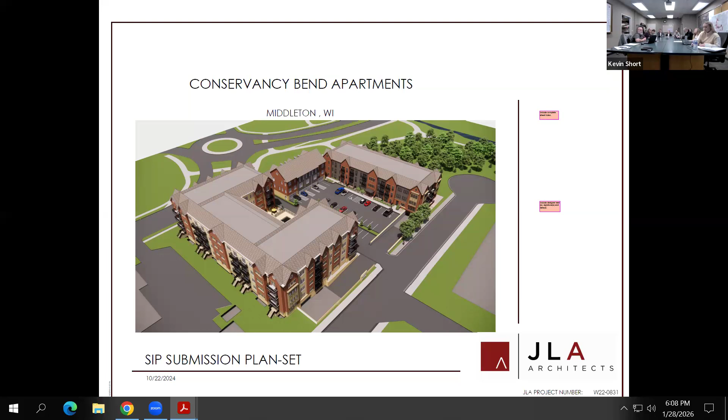So T-Wall Enterprises submitted to the city for review a specific implementation plan, or SIP, dated October 22nd of 2024. The Conservancy Bend apartment development is located south of the Pheasant Branch Creek corridor. It's between Parmenter Street and the high school campus. So it's pictured there in yellow.

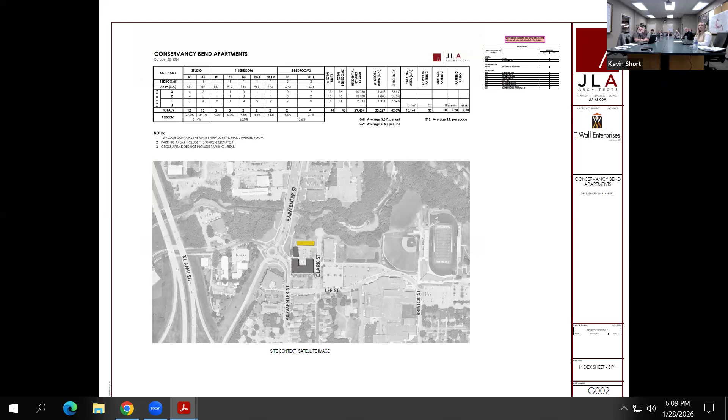It shares a parcel line with the Pheasant Branch Creek Conservancy. The proposed development is the building shown there in yellow, and the black dashed line to the north of the proposed building is the parcel line, or the property boundary.

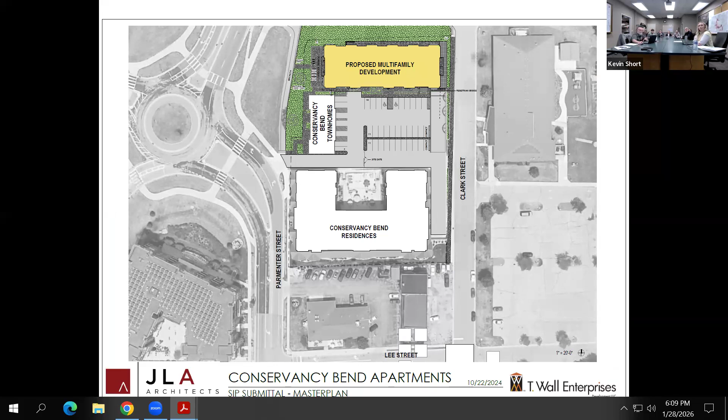And those are on page 2 of the minutes. I'm going to read number 4, which is resolution of all engineering staff recommendations embedded in the plan submitted on 10/22 of 2024.

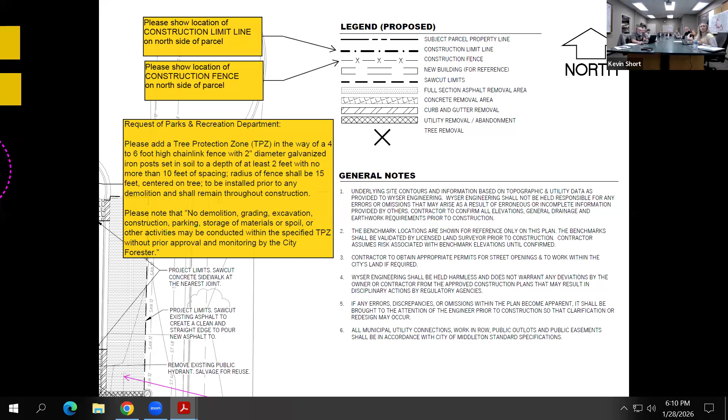So staff recommendations embedded in the plan included the following. Staff requested that the developer show the location of the construction limit line and the construction fence on the north side of the parcel. Both of those are shown in the legend of sheet C101, which is the demolition plan, but neither of them are shown on the plan on the north side of the parcel.

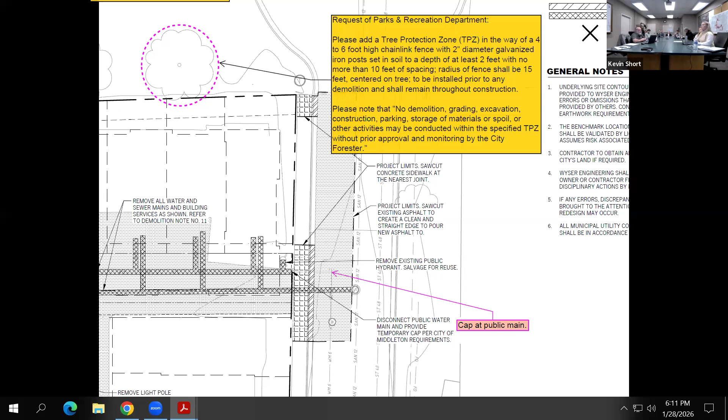Additionally, staff recommendations embedded in that plan included the following. Staff requested addition of a tree protection zone fencing for the Pheasant Branch Creek Corridor Conservancy Oak, and provided a specification for that fencing. The staff note references our forestry ordinance, chapter 20.06, paragraph 2, protection during excavations.

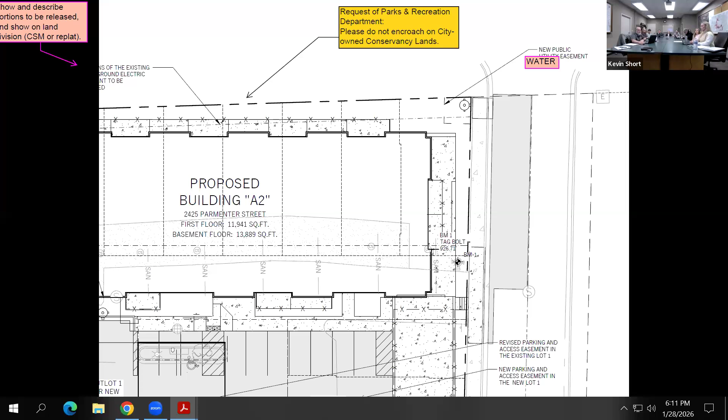Additionally, on 4 occasions in that plan, construction activities, we requested that construction activities do not encroach on conservancy lands, with the comment: please do not encroach on city-owned conservancy lands. That is on C102, the site plan; C200, the grading and erosion control plan; C201, the detailed grading plan; and the landscape plan, L100.

And on that same sheet, staff requested that the zoning of the abutting parcel be noted. Our conservancy land, Creek Corridor parcel, is zoned as conservancy. That's a requirement of a landscape plan as per 10.08.20, paragraph 3 of municipal code. It's a requirement of the plan submission.

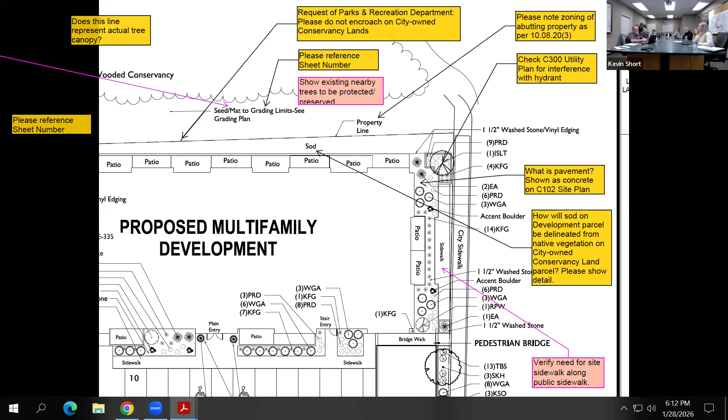So in response to those comments in the staff recommendations, the developer did not change the distance of the north side wall from the parcel line or the location of the building. The developer did not approach this committee and discuss use of the Conservancy land for that construction. But the developer did submit a revised plan set.

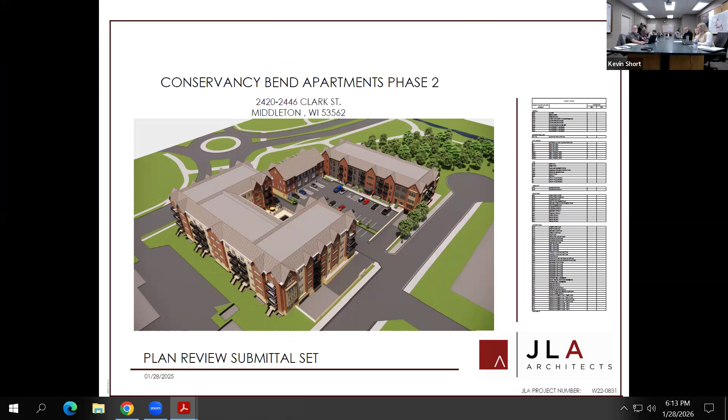On January 28th, 2025, T-Wall Enterprises submitted a plan review submittal set. On sheet G001, which is the index sheet, the second page in the document, it lists the general contractor, the architect, the civil engineer, and the structural engineer as part of the project team.

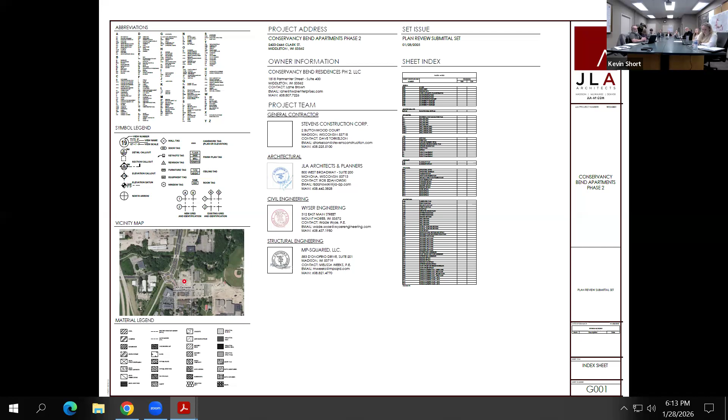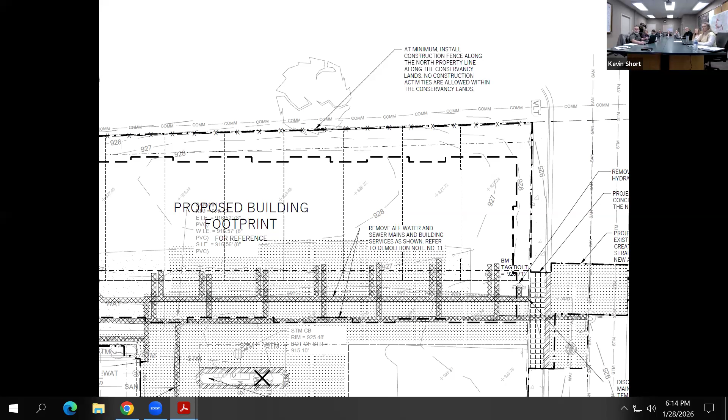So that plan set did address the contingencies of the Plan Commission motion. The request to not encroach on city-owned conservancy lands and the request for fencing were addressed on two sheets with the statement: at minimum, install construction fence along the north property line, along the conservancy lands. No construction activities are allowed within the conservancy lands. That is on page C101, the demolition plan, and sheet C200, the grading and erosion control plan.

The landscape plan, sheet L100, includes a reference to our forestry chapter 20.06, the one I mentioned earlier. And that reads: all trees on terrace, median, or other public-owned property near any excavation or construction of any building, structure, or street work shall be sufficiently guarded and protected by those responsible for such work as to prevent any injury to said trees.

Oh, Edgar, that needs to stay open. Yeah, sorry.

It continues: during construction operations, each contractor or builder shall erect suitable protective barriers around public trees and shrubs which could be injured during construction, and shall obtain the city forester's approval of the adequacy of such barriers before construction is commenced.

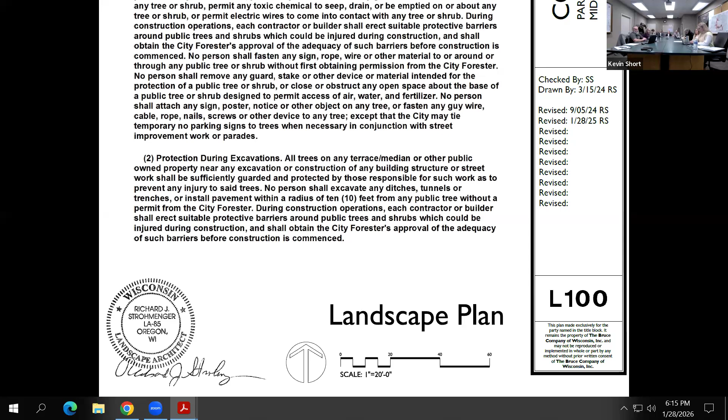So based on the review of that plan submittal set, city staff determined that the contingencies of the Plan Commission motion from November of 2024 were adequately satisfied, and a building permit was issued on August 1st, 2025. I don't have a photo of that, it's a blank page, sorry.

But let's talk about the tree. During the winter of 2024-25, our Conservancy Lands forestry staff crew made reduction cuts on the south side branches of the oak tree, to provide clearance for any future construction activities that would encroach on the Conservancy side of the parcel line.

During the spring of 2025, the Conservancy Lands crew conducted a prescribed burn of the Parmenter Bowl, which includes this area, and followed the burn up by overseeding with a diverse mix of native forbs and grasses.

During the growing season of 2025, Conservancy Land staff, our Oak Hill Correctional crew, and city contractors removed invasive species from the creek corridor, including this area, in accordance with the October 2024 Pheasant Branch Creek Corridor Restoration Plan that was approved by this committee.

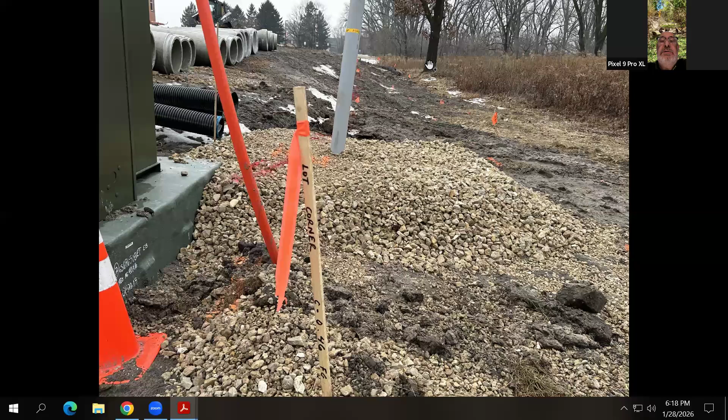This photo shows the view down the orange flags of the communication line, which from the plan set, where this communication line crosses the parcel line, is about 6 feet north of the property line. At the oak tree, it's about 4 feet north of the property line. So that gives you a good scale looking down that line of communication line flags.

Hey Kevin, isn't that tree supposed to have a fence around it? Could you speak louder so we can hear? Just wondering if that tree is supposed to have a fence around it. The plan review set doesn't specify a tree protection fence around the tree, it specifies a fence along the property line. Okay, so yes, they're supposed to have that.

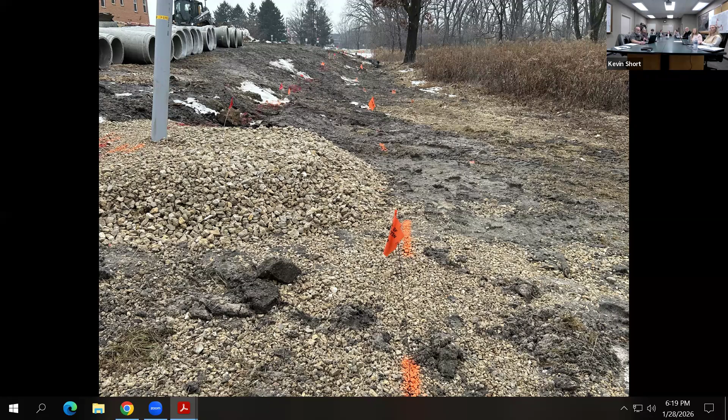This final photo, from January 6th, just a few days ago, shows the base of that oak tree, and shows erosion control sock that's a foot or two north of the communication lines we saw in the last photo. So that puts that erosion control sock 6 to 8 feet out from the property line.

And that takes us to a point. In a letter dated January 22nd, 2026, T-Wall Enterprises / Conservancy Bend 2 Residences LLC is requesting a temporary construction easement. According to that request, the general contractor, who from the plan review submittal set was a member of the project team since at least January of 2025, is now recommending a temporary easement 15 feet from the property line to, quote, protect construction team members, pedestrians, and the Conservancy.

I can't comment on the safety of the construction team members, but I can verify there's no pedestrian infrastructure along the north property line. The closest pedestrian infrastructure is, one, the sidewalk along the west side of Clark Street that ends at the property line, and two, the asphalt path on the east side of Parmenter that leads down to the creek corridor path. As far as protecting the Conservancy, I would argue the best way to protect the Conservancy would be to install the originally requested fence along the property line and restrict any activities within the Conservancy.

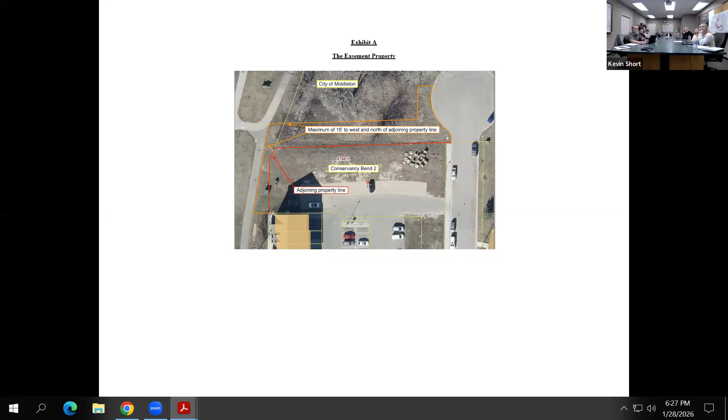So this is Exhibit A. This is the easement property. This exhibit is a clean copy, meaning those are the notes provided to me. So this is the exhibit that defines the easement.

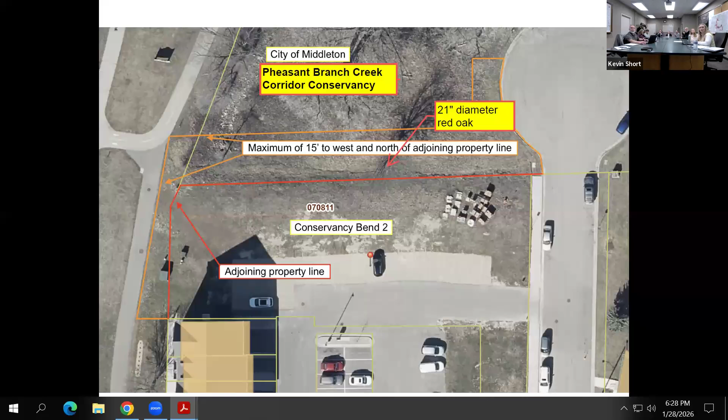Okay, I'm going to go to the next page here. These are my notes in yellow. I labeled the Pheasant Branch Creek Corridor Conservancy, and I labeled the location of the 21-inch diameter red oak. And then this is more of my notes here.

So remember, this is Exhibit A. This defines the easement. In the temporary construction easement letter request, a 15-foot easement is requested. The text of Exhibit A reads maximum 15 feet. However, their graphic shows a far greater area. The exhibit shows a 61-foot boundary from the north along Clark Street here, and shows a 26-foot boundary throughout the rest of the area.

And then to the west, this line is the property line, the red line is the parcel boundary. So to the west is areas outside of conservancy land, which I would say is outside of what this committee might be willing to make a call on. This is City of Middleton right of way, and these lands both have stormwater infrastructure. So I would argue that Public Works Committee and/or Stormwater Management Commission should weigh in on any permission given for those areas.

That's where we come to. So we have a recommended motion: number one, recommend to Public Works Committee and Stormwater Management Commission review of the temporary limited easement agreement for a recommendation to Common Council on any of the affected areas of proposed easement that are on city right of way with stormwater infrastructure. And a staff recommendation to recommend to Common Council denial of the temporary limited easement agreement between the City of Middleton and Conservancy Bend residences.

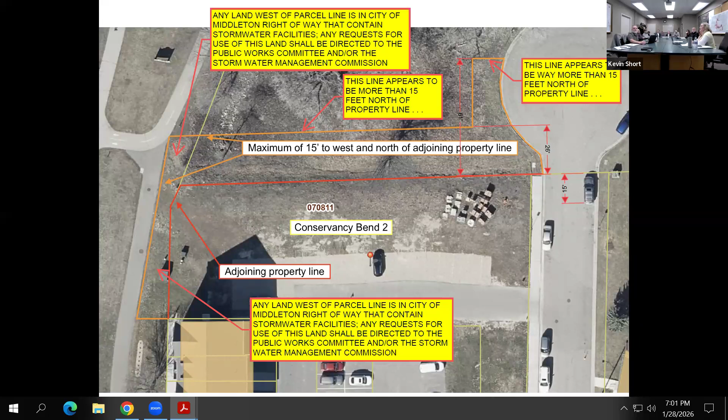And it's about the activities that you're asking to take place within that easement. Tom, are you asking to see the easement document with the construction activities on it? Yeah, I'm not married to that easement.

Again, collaboration is the name of the game. I've been doing this long enough to know that every good development happens through partnership with the municipality and meetings, usually in advance of the committee meetings, Kevin.

So this is where, and I think that's my point, this plan commission went through in November of 2024, and this is the first we're hearing about this. Construction started January 15th, and we've... but the plan was to stay off, Kylie.

I showed you, you guys, you probably approved it, right? When Abby went around to get all the staff sign off, I'm sure you approved these plans, their comments. Yes, exactly. And so those were in compliance and hence we got a building permit. We have a building permit now.

So I can go forward, put the fence exactly on the property line without getting this easement, without adding 10 trees, without restoring, technically, because that's an MG&E matter to work out with the city, because guess what? The city and MG&E are party to that easement.

Okay, so that's MG&E. So if you guys want MG&E to go spread whatever seed mix they have, which I assure you is not the one cultivated by your conservancy division, right, then go for it, go with MG&E. That's not our contractor. That's somebody that is a utility provider that's in concert with the city. Again, city of Middleton's a signatory to that.